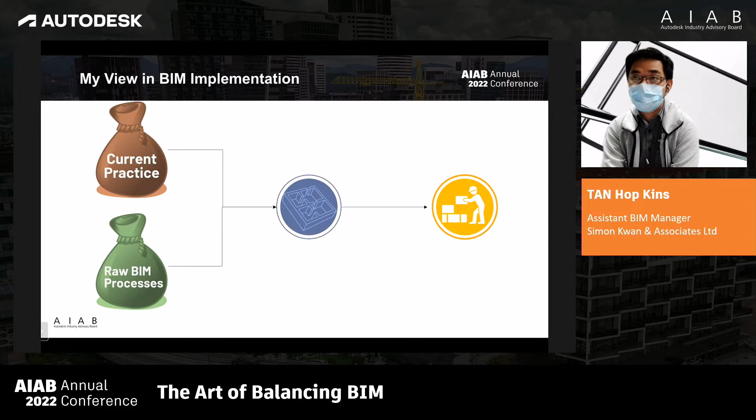So as a challenge of a BIM implementer, what is important is how you can balance BIM implementation, so you do not interrupt the ongoing process, but at the same time improve it. So this is how I view BIM implementation in a nutshell. You have a bunch of current practice where you have to document a design and you incept a design.

And then now you have raw BIM processes such as BIM workflows, let's say design automation, that are all raw. In this industry, it's all about the technology moving forward. However, too much BIM implementation will cause the current practice to lose balance and reject BIM. So as a BIM implementer, I think the best way forward is to work with the team to improve the current practice.

When you manage to merge the BIM process into current practice, it will not create redundant work, thus forming a refined BIM workflow specific to the firm that you're working for. Of course, every different firm or every different country has different ways of implementing BIM. It all goes back to what you want to achieve with BIM.

So let's say you have 10 processes in BIM. But in the design stage, not all the processes are meaningful at the right time. In the design stage there will be different types of BIM processes that are meaningful. In the tendering stage, there is also a different kind of BIM process that is meaningful. But if you were to push all the same processes into current practice, going through the same flow, it will be an overload of processes. Therefore, it would not create a meaningful design in the construction industry.

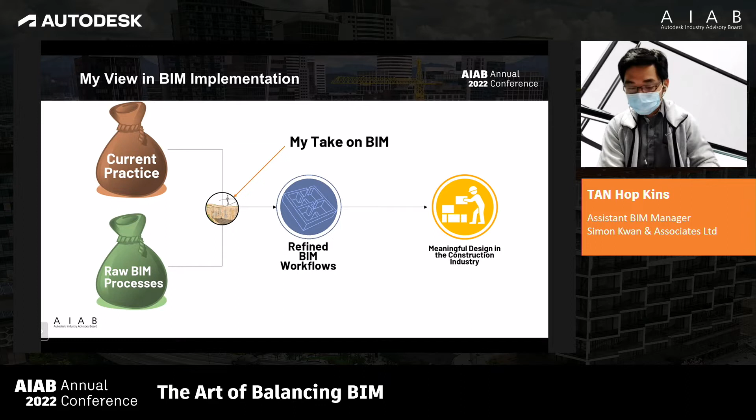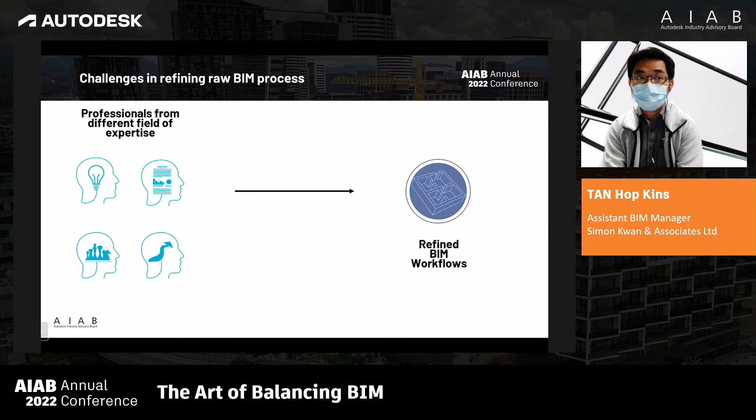So, like I say, in the field of construction, there are different expertise and different experts. Let's say the design inceptor and the documenter both have different points of view. And then we have the project manager with a different kind of view, a different kind of balancing between time, cost, and money. So when BIM pushes forward a new workflow that is untested, there will be arguments and rejection. Why? Of course, there are the common reasons that everyone has heard before.

One is the lack of expertise in BIM, which at this time is picking up. Two, is there a need for change? If we make this change, what disadvantages are we going to face, and what advantages can we see in the future? Of course, you guys have heard many presentations about how BIM can help a process. But at the same time, how much time and resources would you put into finding a process which includes BIM workflows that are wrong?

Then thirdly, the project requirement, whether it requires BIM or not. For example, in my experience in Cambodia, if the client pushes BIM and wishes to see a virtual construction, and it is in the project requirement, it's a very effective way to push BIM. So how can you find such a project requirement? Normally, the stakeholders encouraging BIM are on the design-build side, normally the contractors, where they see the value of BIM as a very high turnout.

However, it's not just the contractors that should be pushing BIM, but every industry expert, whether their contribution is small or big, everybody plays a part in the contribution of BIM. So after you go through this coordination, this collaboration with different experts, you can push through to create refined BIM workflows for your company.

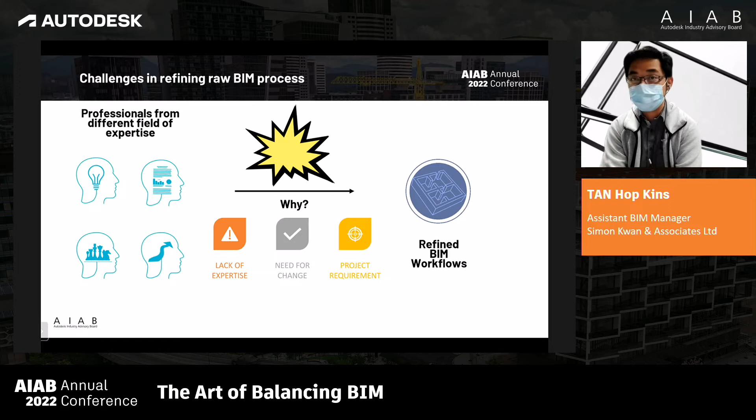As BIM plays a role as information regulator, I see that a common platform, a common language, or common sharing of data will be beneficial to the project, as a common environment will provide a single platform where everyone can share their opinion on the same object.

So I would like to share, from these 6 to 7 years of implementing BIM on the lower level, what can be done. Firstly, to the main topic of the presentation: how do we balance the involvement of BIM and the authoring part? There are 2 approaches to BIM implementation. I'm not talking about the higher level, but on the working level, there are 2 approaches where BIM can drive a design approach.

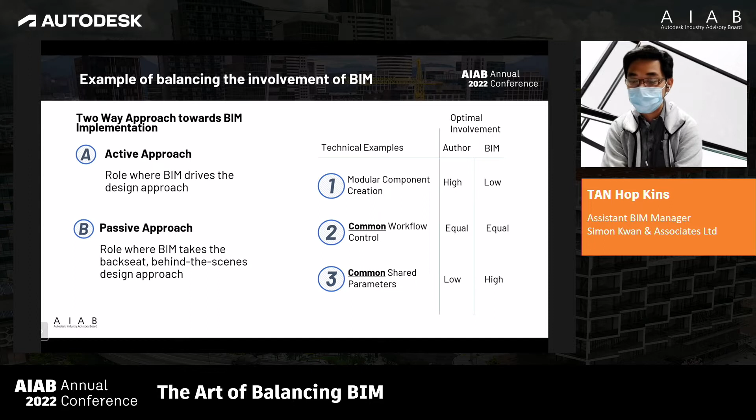For example, one of the workflows that I can share is the relationship between the BIM implementer and the information controller. The BIM implementer doesn't have to be a BIM personnel. It doesn't necessarily have to be a project designer or project engineer. It has to be one person that thinks BIM can improve the whole design process, the collaboration process, and bring it into the project environment from a raw BIM process.

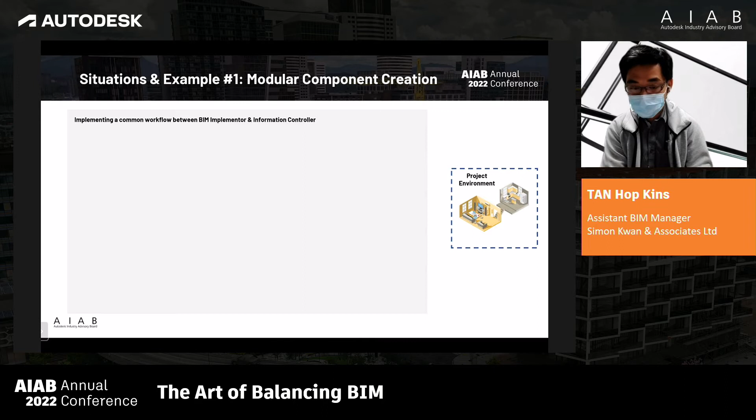Let's say you're incorporating a new element into a project environment. Firstly, a BIM implementer, who is the author of the element, goes through a process where they create an element, place it into a common folder or common library, and share it into a project environment. Of course, this is a very straightforward goal that doesn't make any hiccups.

However, when you are managing multiple data streams, the role of the BIM information controller comes into play, where they control the information and whether it's standardized, because the BIM information controller not only works on their own project, it goes through different projects at different phases. So information needs to be digested and processed into a common language that can be shared through multiple stages. This is the role of a BIM specialist in information controlling.

So when you go through this process, it cuts down a lot of redundant time and remaking of a single element for the project, thus saving a lot of manpower and time for faster deadline submissions. Next, information controlling is a two-way feedback. As I said, you're taking on an active role and a passive role, and both have to be balanced in the right way so that it doesn't interfere with the ongoing processes.

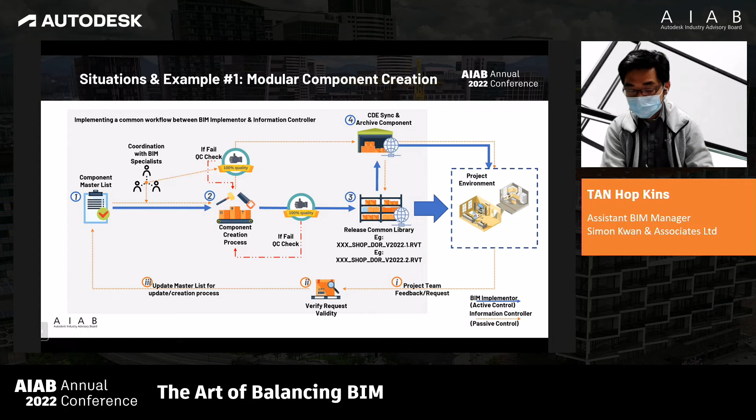On the second example, we can see that unregulated communication between different level expertise will also cause a problem in a common workflow. This comes in when the BIM implementer and the BIM information controller come at the same degree of control. Firstly, you have an author from a different project who gets an element from some weird source entering the project, which is unregulated.

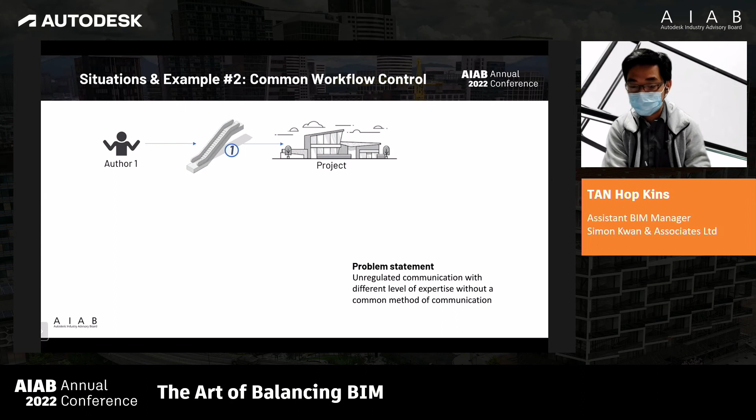The second author gets the information from the project, implements it into the same project, but doesn't know what's going on. So when BIM takes the backseat as a support team, our role is to guide the new authors or the second author on what has been done by the first author. All this goes back down to how you control information flow when you have multiple data streams in this current industrial world.

And then we have a person from another project, which actually brings in extra garbage into the current project because he doesn't know what's happening. All these different data streams, 1, 2, 3, now we have 3 kinds of elements entering the same project, which have different parameters that we need to share. At the same time, when we want to achieve something, we end up with multiple redundant elements that don't provide any meaningful information. When information isn't meaningful, it's just raw data that's waiting to be digested.

Now, when it comes to the fourth person, that's actually extracting information out, whether it's through schedules or going through different information sharing methods through IFC, he doesn't know what the heck is going on because there's too much redundant data that is not processed by a single source.

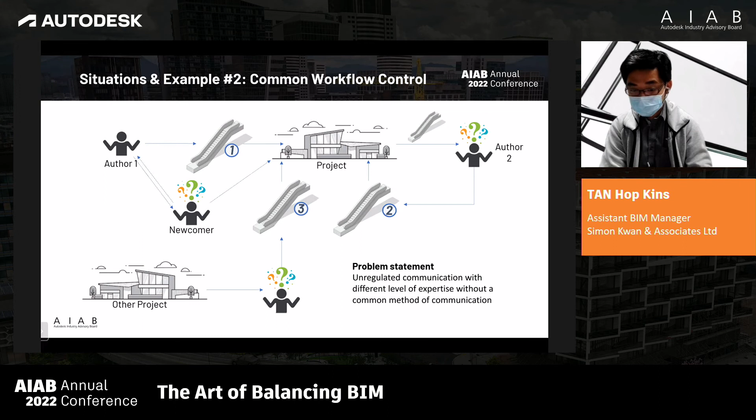So the third, when BIM plays a heavy role through the backseat line of a project, when the BIM team has a higher degree of control, we are able to control the data, the common environment, and how we input the data for the project team. However, this degree of involvement takes a higher level of involvement, a lower level of passive involvement from the BIM implementer, and a higher degree of knowledge from the author.

When we actually achieve such balanced control, the implementer will not reject BIM and will see BIM as a supporting element to actually develop the project up to construction phase. And then it's solely transferring of data to the FM stage. Of course, all this depends on how good your information control is, which is the core BIM team of a company. I believe that every person that is equipped in BIM is able to understand that a common data environment is very important in BIM implementation.

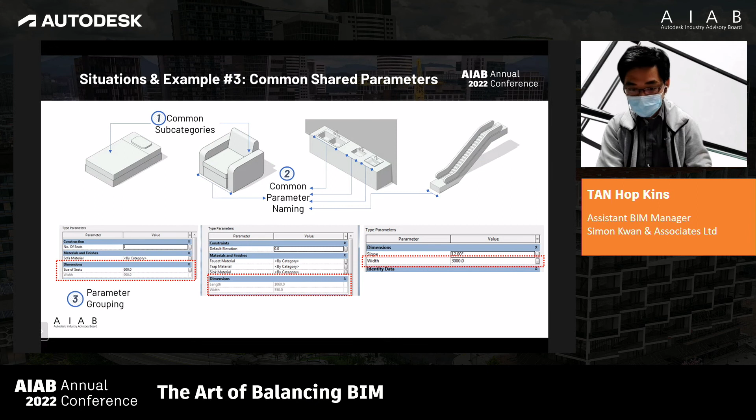So to sum up what I'm trying to say, how you control your project will actually affect how much benefit there is towards the BIM implementation process on a working level. Firstly, you can have greater involvement towards BIM from the project team, because as they see BIM as a process that actually helps them and doesn't stop them by creating multiple gateways, they'll actually take in BIM more easily. You cut down the rejection, and then they see the output immediately.

Of course, you do not see the output or the benefits of BIM immediately, because, let's say you implement BIM, in the first 3 months you will not see the benefits of BIM. But 3 months later down the line, judging by the volume and sheer scale of a project, the project team is able to gravitate towards the benefits of adopting BIM in their project.

Secondly, now we're handling multiple sources of data. A good BIM team that actually provides a common data environment will be able to sort out the data that's meaningful. When meaningful data gets sorted out on a common background, it'll produce meaningful information, thus at the same time increasing the BIM expertise of an implementer.